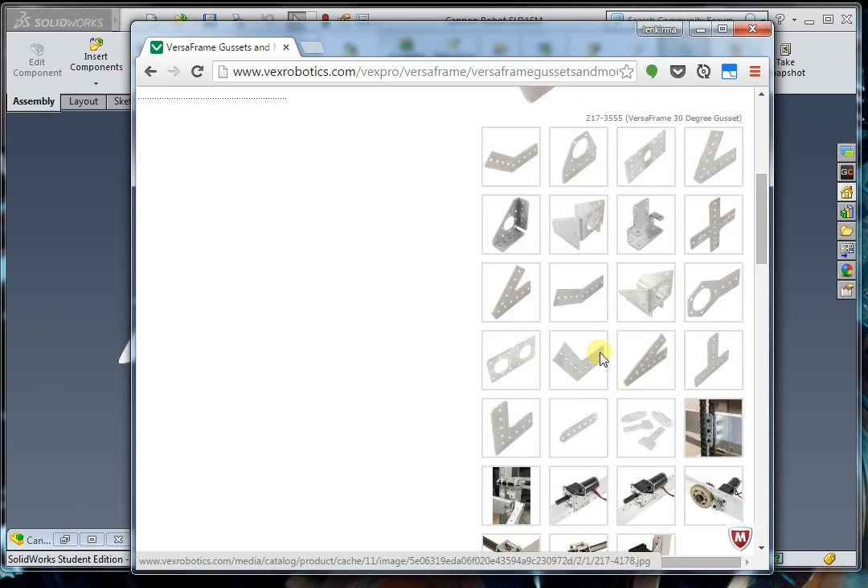And you can see VexPro supplies a bunch of different varieties here. You have different angles, different kinds of arrangements of holes. Here's a cross one. This one can put some bearings in the end if you want to make a swivelly kind of arm thing. Anyway, the one we're interested in today, though, is just your standard right angle 90-degree bracket.

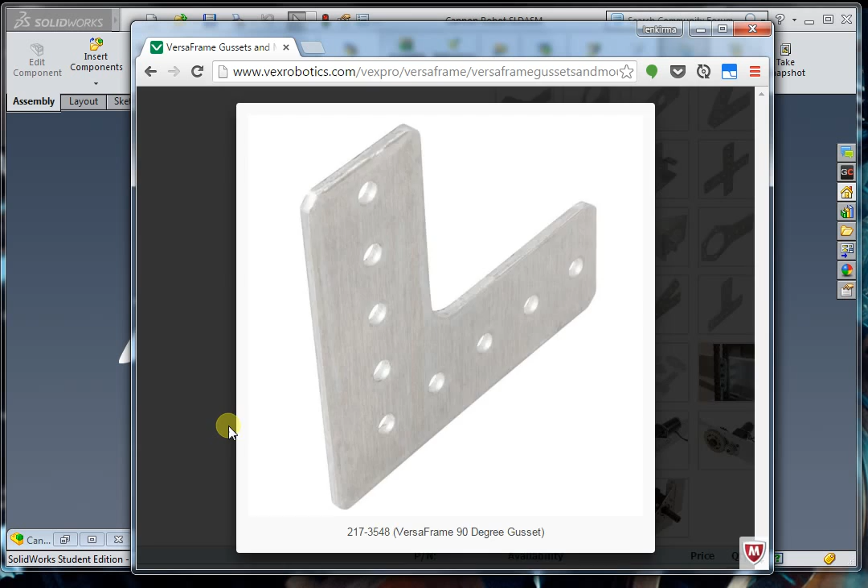And so we can see here that the part number for that is 2173548. So if we scroll down now to the bottom of the page, different manufacturers may put their models in different places, so sometimes you have to hunt around a little bit. But luckily, the VexPro ones at least are all in the same place here. So we can go down to Downloads and Docs. Sometimes theirs are actually in a tab called 3D Model, but in this case it's Downloads and Docs.

And we said our number was 3548. We can see that's here. It gives us clarification of its 90-degree gusset. So we'll go ahead and click that. And then it's going to download what's called a step file, which is kind of a generic format for CAD models. A bunch of different software can open this kind of file. Unfortunately, SolidWorks can't work with these directly, so our first step is going to have to be to convert these. But before that, go ahead and download the file.

And when Vex gives them to us, they put it in a zip file here, a compressed file. So then we need to open that up and go ahead and extract the file here. So you can right click and extract all. We now have our step file that's been extracted there.

So if we go back to SolidWorks, we're going to come up to open file. Go find where we downloaded our step file in the extracted place. Open that step file there. It'll do some processing. Sometimes if it's a more complex part, it'll take longer.

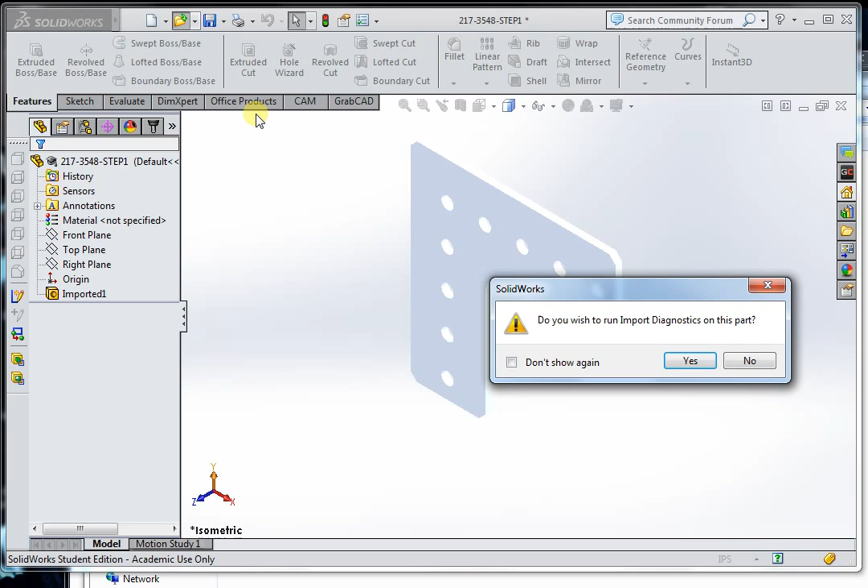Then it's going to ask you two questions here. It's going to first say, do you want to run import diagnostics? We can click no. And the next one it will say, do you want to proceed with feature recognition? Sometimes if the part's made kind of wonky, you may want to click yes, but that gets more complicated. So in most cases, you can just click no. Try it with no first. If things go horribly, horribly wrong, try the feature recognition and you may get some better options.

Okay, once that's fully opened now, we need to go ahead and save it. What this is going to do is it's going to take that file that's been converted from step, and it's going to now save it as a SolidWorks part so that we can use it in other assemblies and other mechanisms, that kind of a thing. So we can just go ahead and save it. I'm going to just save it where I downloaded it.

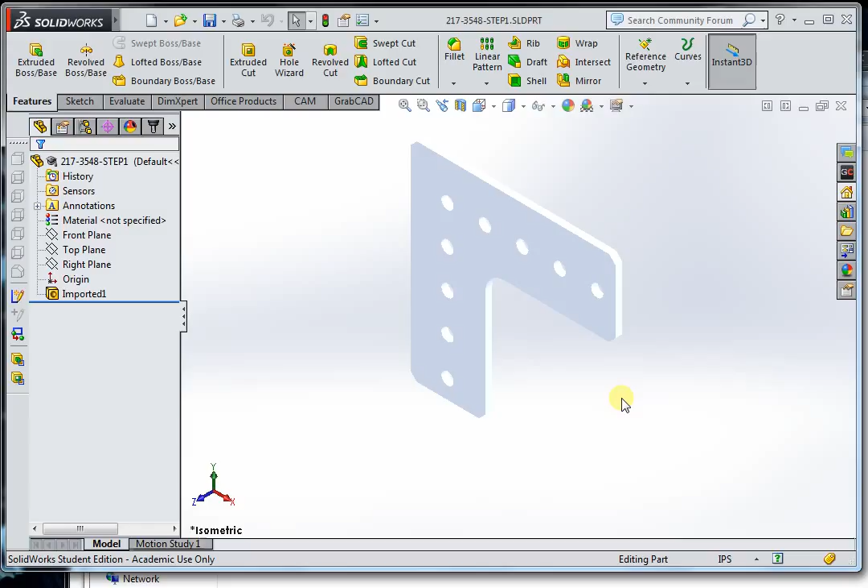If you're dealing with a bunch of different files, you probably want to establish some sort of nice directory structure for holding all your different parts. But since it's just a single example here, it doesn't matter so much, I guess. To show how we can use that now, we'll go ahead and create a new assembly.

You can see it's hopefully opened this Begin Assembly box here, and we can see there's a couple different options. This first one here, you can see it's our 3548. So that's our part that we just converted. So you can click out here in the middle, and that will throw that down.

If you've already started an assembly and you want to add additional parts to it, you can get to the same kind of adding parts option if you go to this Insert Components button up here on the Assembly tab, so you can click there and you can see we're in the same place again, so we can add additional ones here.

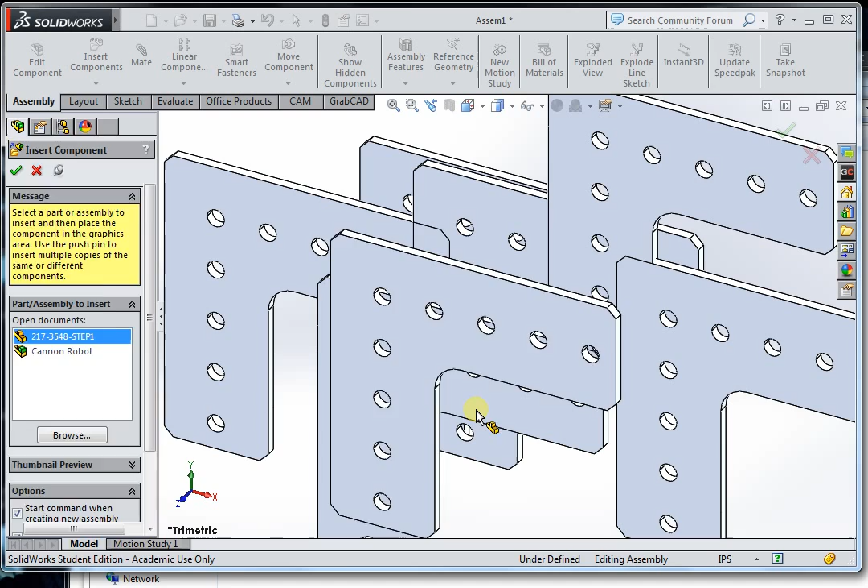Kind of a pro tip, if you're trying to add a whole bunch of parts at the same time, you can come up here and click this little push pin button. If I don't push that, I put one part in, you can see it closes the Insert Components menu, which is kind of annoying, but if I click the push pin first, then I can drop a whole bunch of components in quick succession, which makes it a lot faster to start our assembly. Anyway, we've added way too many gussets now, so let's go and delete a few of those.

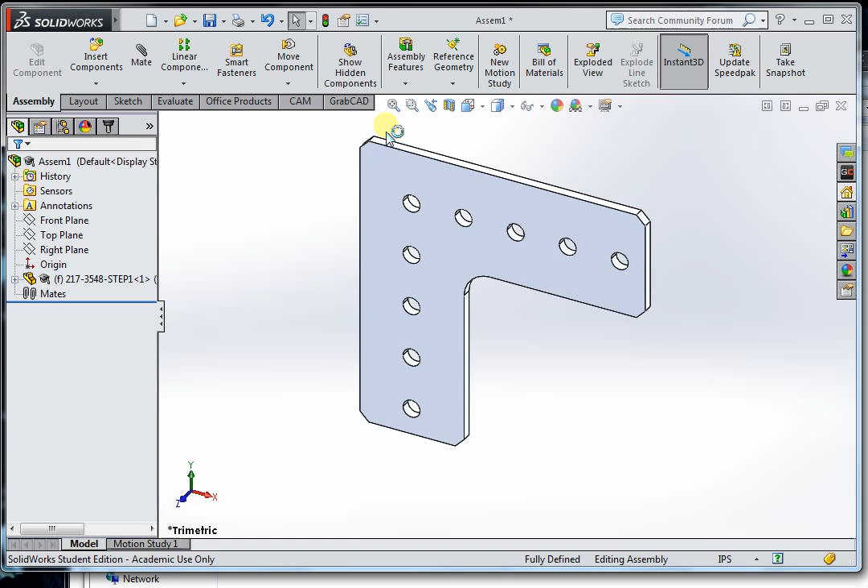Now we need something to assemble our gussets with. So let's go find our piece of 1x1 box tubing that we made in the previous tutorial, if I can find where I saved it. Solidworks has this handy open recent parts feature that I'll go ahead and make use of now. Hopefully you are able to better track your parts than I am.

Now if we go back to Insert Components in our assembly, you can see that it's added 1x1 here. Basically, this box shows you all the parts or assemblies that are currently open in Solidworks. You don't necessarily have to open them first. You can go down to this Browse button and then find your part or assembly and insert it that way, but it didn't work out for me this time, so we'll just do it this way instead.

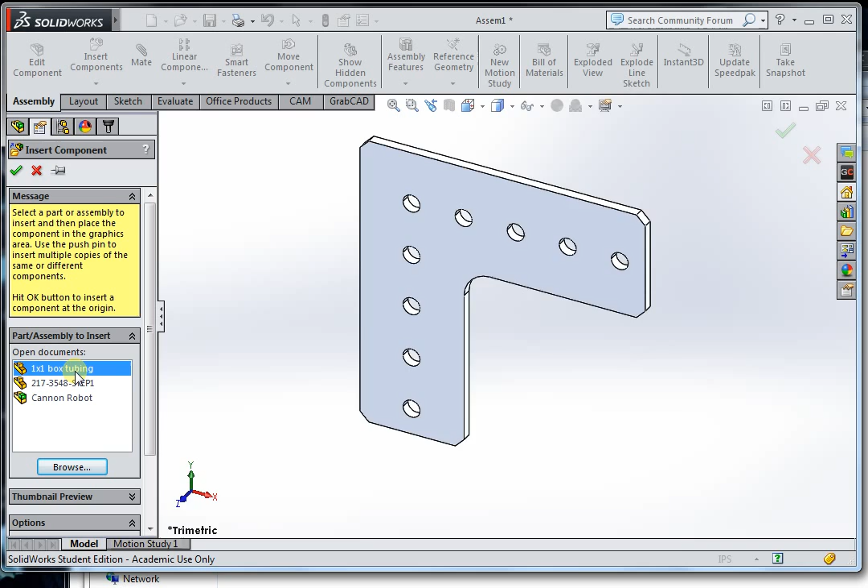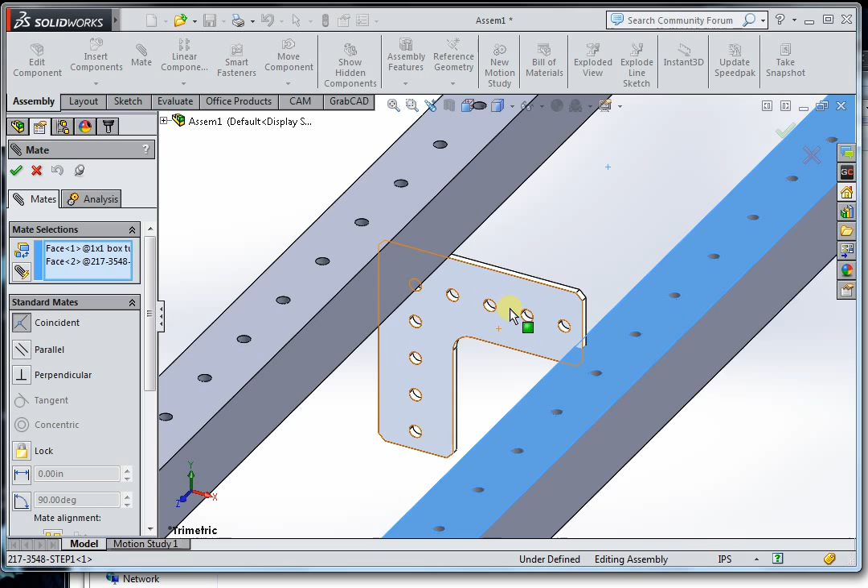So I'll go ahead and put a couple of these 1x1 pieces of tubing in there, and we can quickly add some mates. If you need a refresher on doing mates, go back and look at the basic assembly tutorial that you did last time. But we can quickly throw these together here. We've done some face mates, some coincident mates, and then we can use some concentric mates on the holes here.

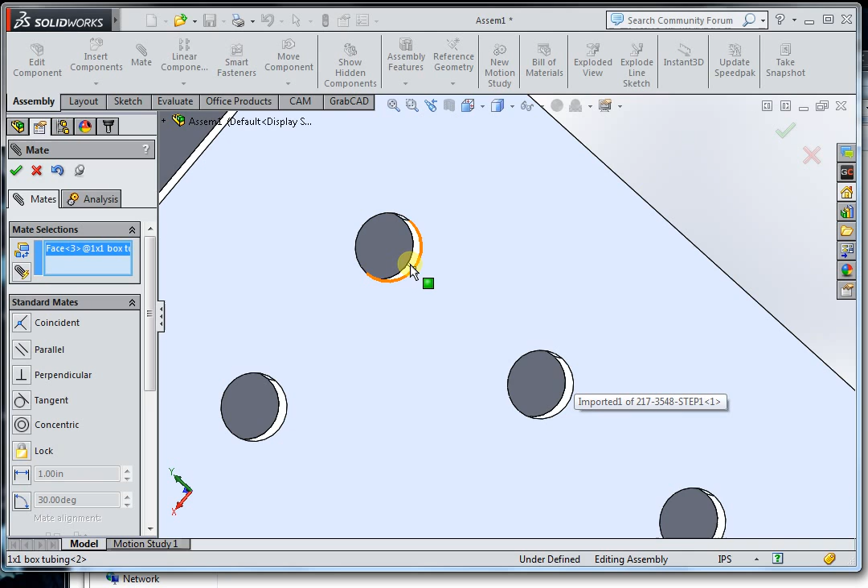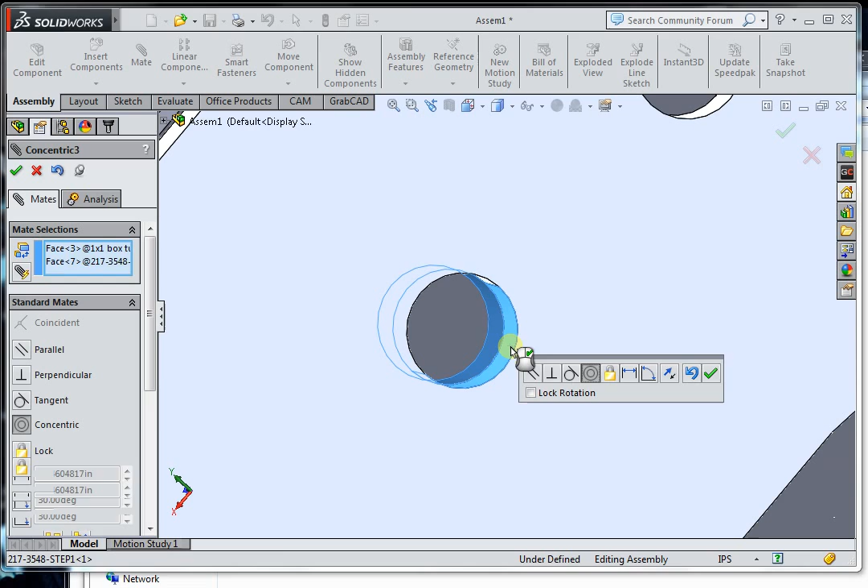Lined up the part there, and you can do another one down here at the second. That one is lined up there. We can do the same thing for our other piece of tubing. Grab this one here. One thing to note is that on the VexPro gussets, the hole spacing is every ½ inch, but on the tubing it's every 1 inch. So you'll need to skip a hole in the middle.

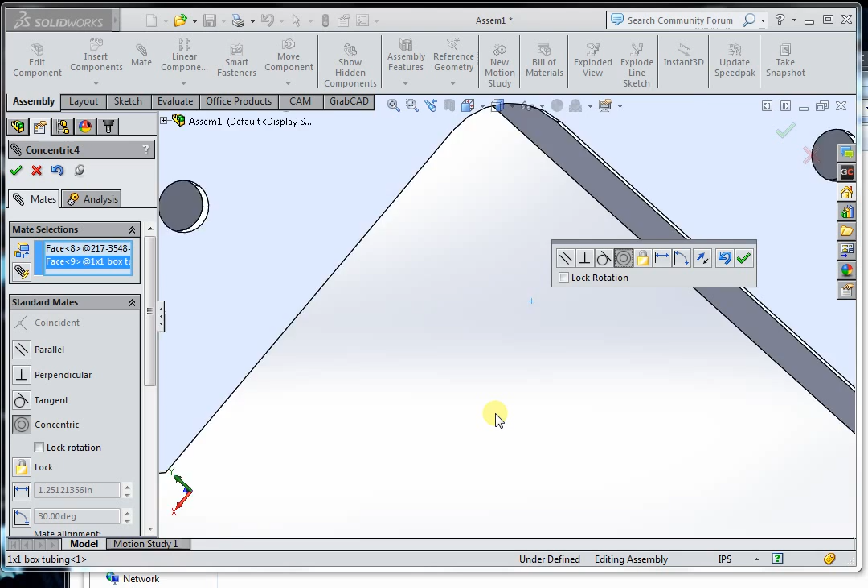Put it there. Now everything's lined up. Get ourselves a nice 90-degree joint here. If we wanted to make it even more robust, as is probably advisable, we could put another gusset on the other side here. But I'll let you guys work that out yourselves. So there you go. Importing a part from an outside supplier and then using it to make ourselves an assembly.